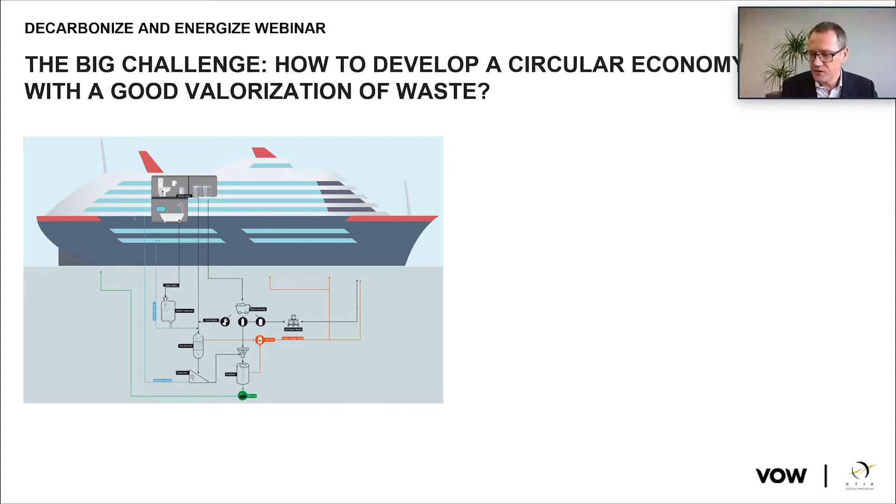The solution is a mix of technologies: filtration, drying, sorting, incinerators, anaerobic digestion, and pyrolysis. Scanship offers its clients a global integrated solution with a portfolio of these technologies, including a pyrolysis technology named MAP with microwave.

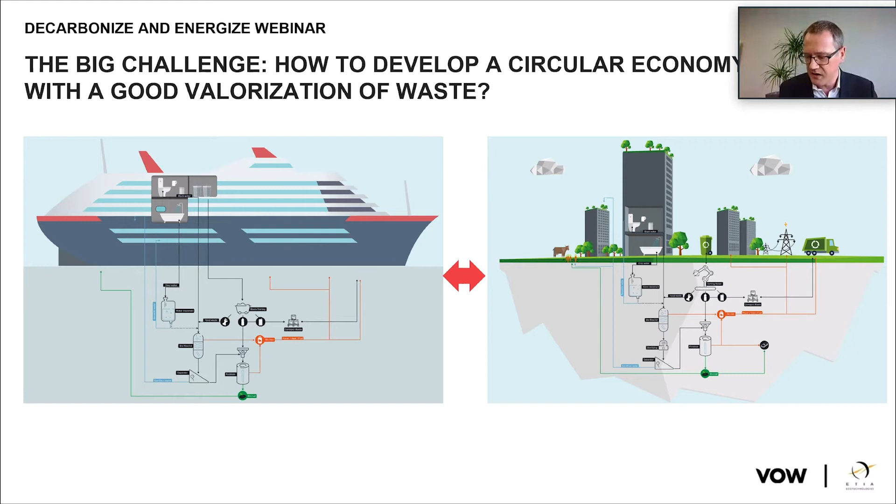For land-based solutions, it is very similar. The capacity can be bigger, and it is where Etia intervenes. So the first important element to notice: the solution for circular economy is a mix of solutions, among which pyrolysis.

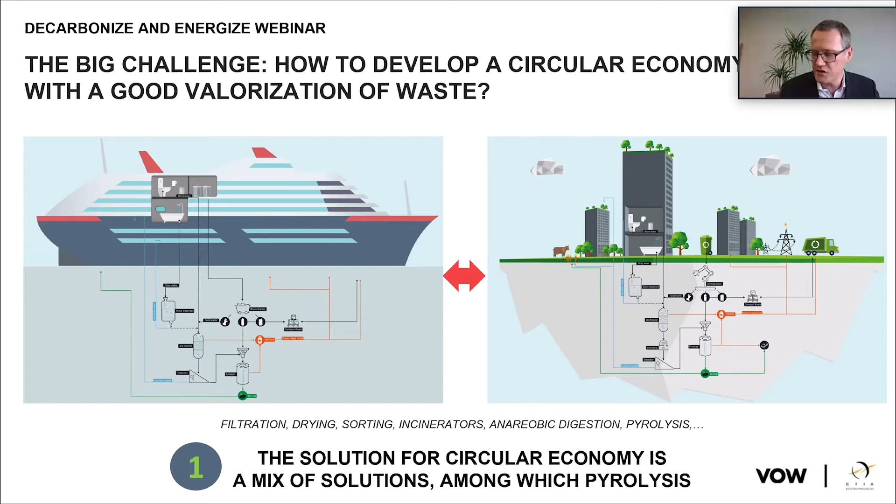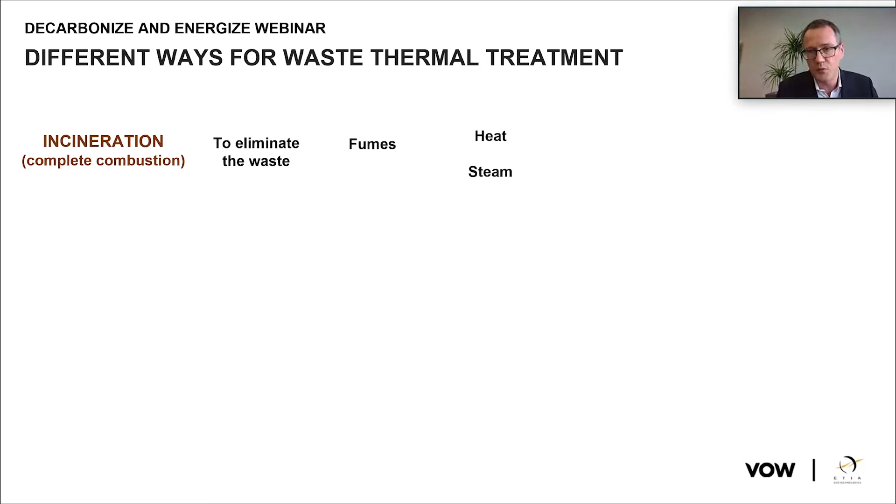Second point: there are different ways to valorize waste through thermal treatment, with 3 main technologies. The first, the best known, is incineration with complete combustion. The objective is above all to eliminate the waste, mainly household waste with a lot of heterogeneity. It produces hot fumes, which can be valorized as heat or steam, and after that, for instance with a steam turbine, to produce electricity, but with low efficiency.

Another possibility is gasification. Gasification is a partial combustion, and the objective there is different: to produce energy with a poor gas, because we use some air and so nitrogen. This same gas can go through purification and into an internal combustion engine that will get higher efficiency.

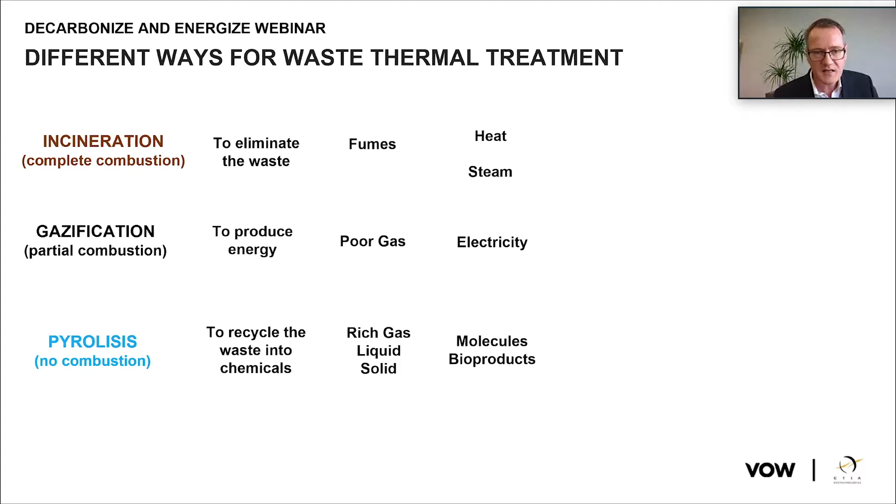And last is pyrolysis, where there is no combustion. With pyrolysis the objective is to go up to chemicals, to split the feedstock into different products: a rich gas, a liquid, and a solid, with different proportions depending on temperature and dwell time. In the old days, I find it very interesting that the pyrolysis of wood was named distillation of wood. That is the idea, to separate the different phases to give them maximized value.

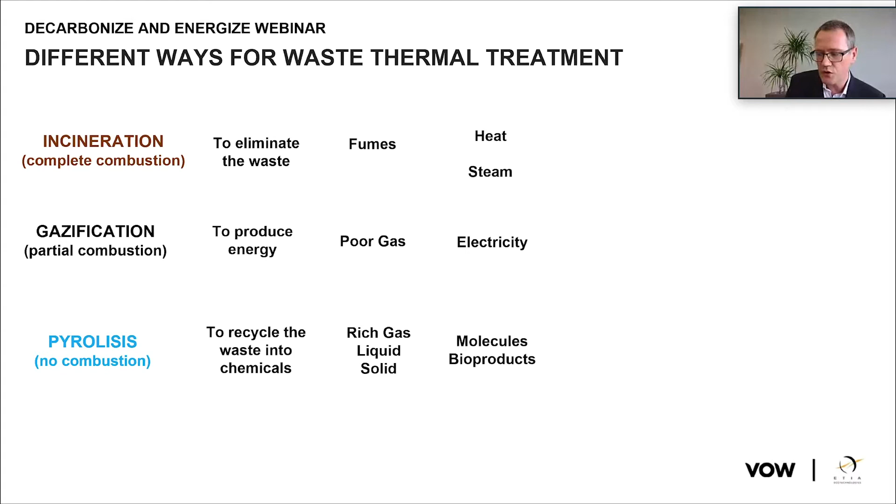With pyrolysis we can also produce heat, steam, and electricity, of course, but also some molecules like hydrogen, methane, and bioproducts with a lot of value.

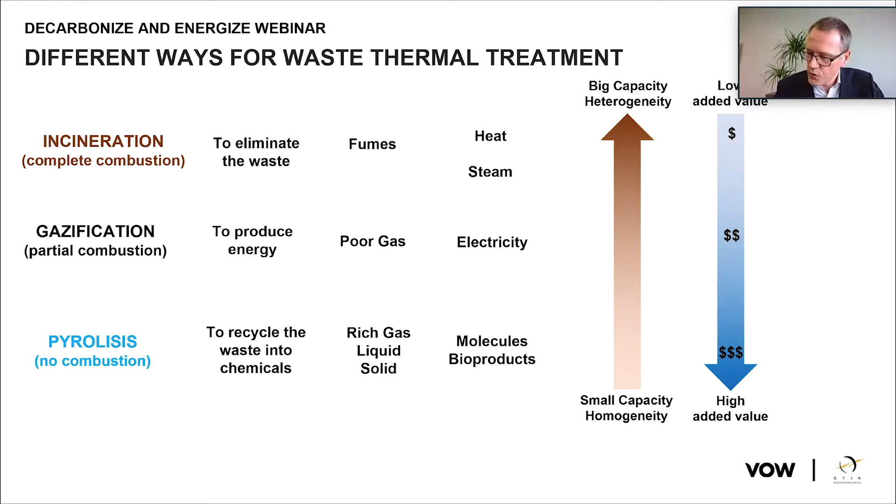Incineration addresses more big capacity with heterogeneous waste, whereas pyrolysis will be more in a circular economy with more specific waste. Pyrolysis also allows reaching higher values with the products, and last but not least, helps reduce more significantly the carbon footprint. So the second element to notice: pyrolysis is key to giving more value to waste.

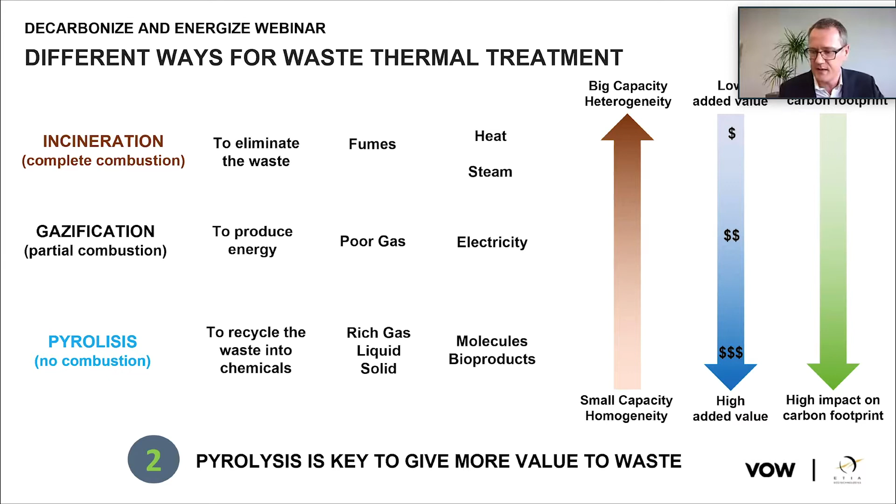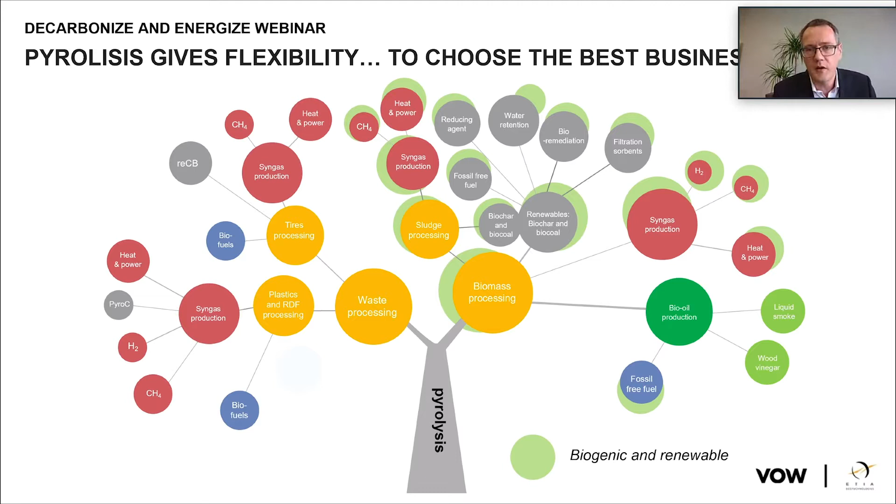And this is done through business model. As pyrolysis gives a lot of flexibility, we can choose the business model among different possibilities. It will depend on a lot of parameters, like the local conditions, the price and quantity of feedstock, and the local needs in terms of energy, electricity, hydrogen, or methane, and of course the price of these outputs. So depending on the feedstock and the energy and molecules required locally, we adjust and choose the best business model.

Third element: waste management has a lot of constraints in terms of regulations. These regulations are more and more strict, and that is good. One main principle in waste management is the waste treatment hierarchy. Producing energy is better than landfilling, of course, but even better than that is chemical recycling, when we can't do mechanical recycling because the waste is too mixed, for instance.

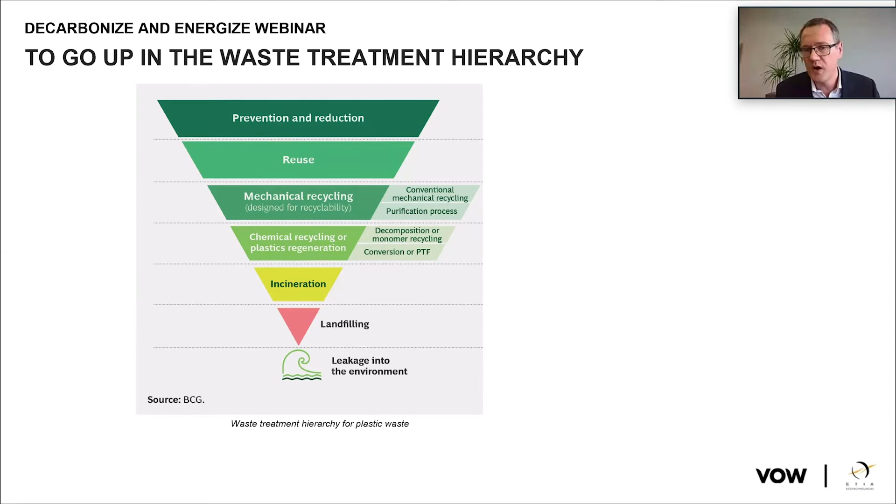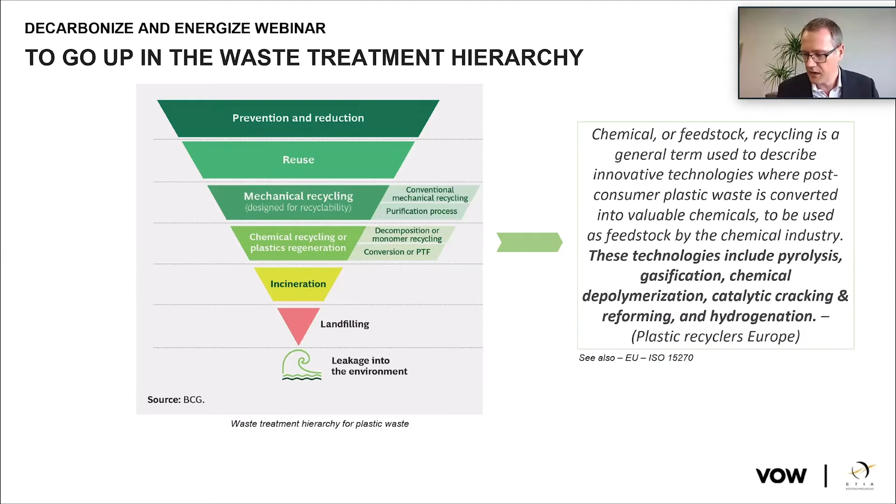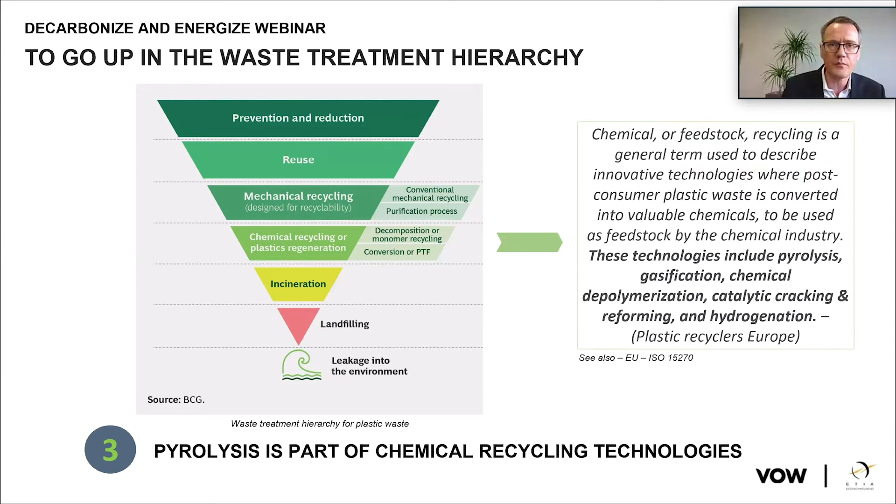As you have understood, pyrolysis is part of chemical recycling technology, and it allows us to move up in the waste treatment hierarchy. So after these first three main elements on valorization of waste, I want to briefly present our technology.

I will not be very long on that because it was part of the first webinar, just as a reminder. So, our main technology is named SPIRAJOULE.

It consists mainly of a screw with a hollow shaft, and this screw is heated by electricity going through it with the Joule effect. So the product temperature is precisely controlled by the heating screw temperature. We also control perfectly the dwell time by regulating the screw rotation speed.

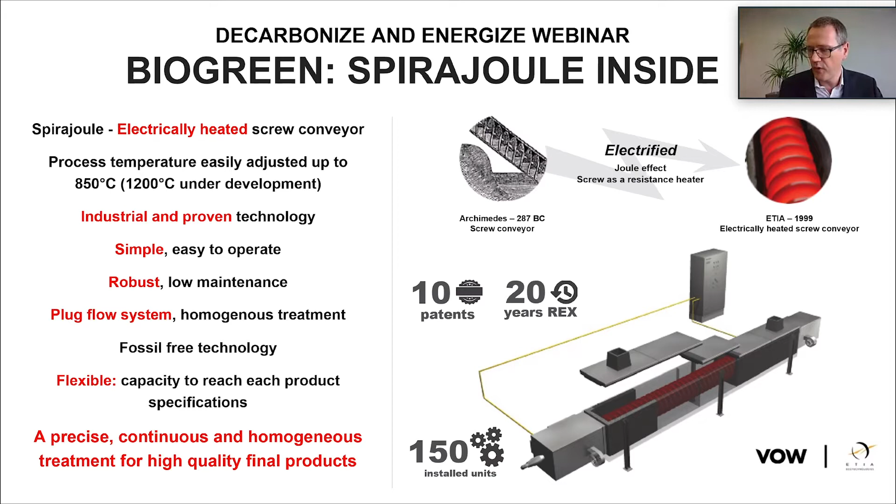We have more than 150 units in the world based on this technology, of which 40 are for pyrolysis. It is simple, robust, and above all precise, continuous, and homogeneous - all the conditions required to get high-quality final products. In real life, you can see there how it looks.

Now we will go through 4 business cases in order to illustrate these elements: sewage sludge, end-of-life tires, non-recyclable plastics, and a little bit different - how we can improve the recipe of feedstock with artificial intelligence.

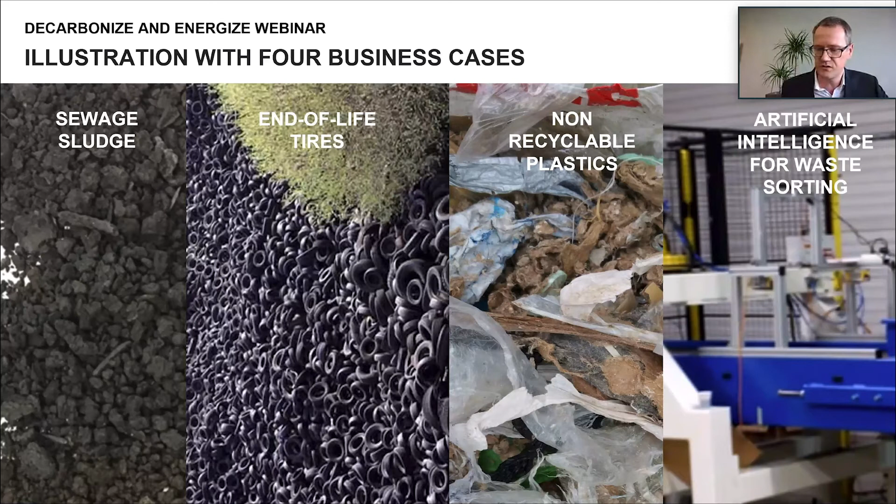First, the pyrolysis of sewage sludge. Sewage sludge is becoming more and more an issue in a lot of countries. One of the main valorizations of sewage sludge is through spreading these sludges in the fields as fertilizer. However, it implies many constraints: problems of odors, the possibility to spread only in part of the year, issues of storage, and the fact that sludges can contain pollutants like heavy metals, which is becoming a bigger issue.

Moreover, it is a very wet product if not dried, and drying is very energy intensive. Another valorization can be incineration, but it does not turn the waste into value, rather into a high cost. So what can pyrolysis do for sewage sludge?

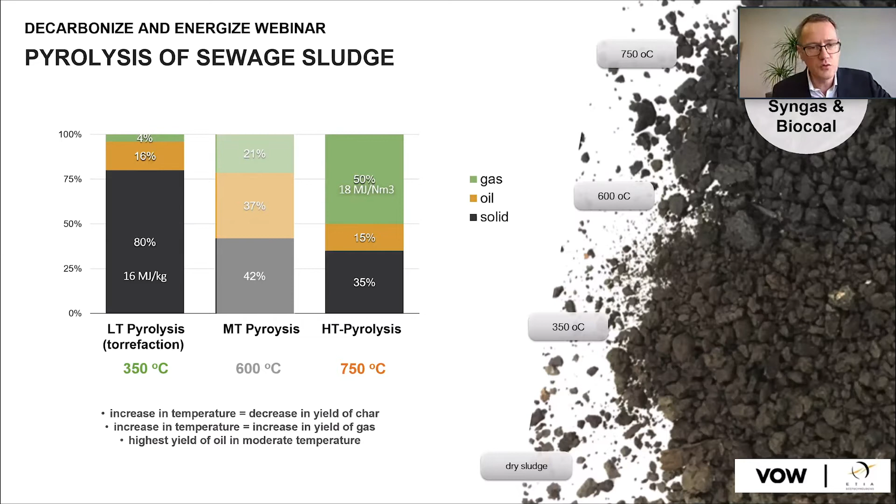You can see on this slide that depending on the temperature, at low temperature we will produce mainly a solid, which we call BIOCOAL, or a gas at high temperature. For our business case, we have chosen to produce at low temperature in order to get a high percentage of BIOCOAL. This business model is illustrated here.

The municipality, in this case in Japan, has more and more issues with sludges. So a company, our local partner, sells BIOGREEN, the SPIRAJOULE equipment, to the municipality to treat its sludges. These sludges are turned into BIOCOAL, and the company commits to buy back this BIOCOAL. Why is the company interested in this BIOCOAL?

It is because it can use this BIOCOAL in a coal plant to produce electricity, and they can benefit from a very interesting feed-in tariff because the BIOCOAL comes from biogenic feedstock. So it is a win-win-win situation, both for ourselves, the company, and above all, the municipality.

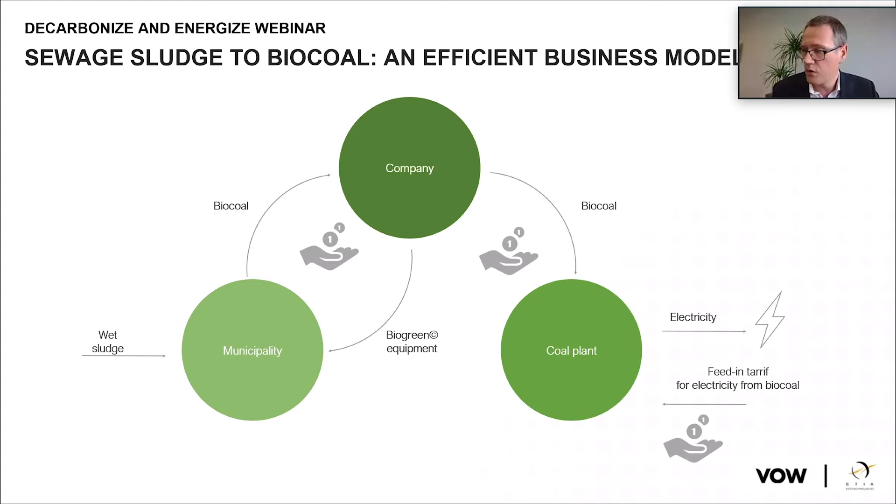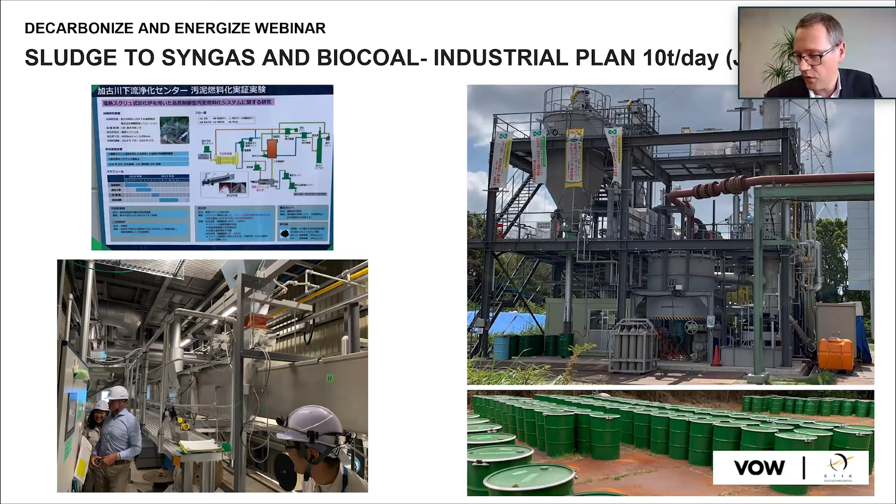But we can do another business. Here are some photos of our first industrial plants in Japan, treating 10 tons of sewage sludge per day. Here is another business model for sewage sludge.

The objective there is to treat the sludges at a higher temperature, around 700 degrees Celsius, in order to produce enough SYNGAS to dry the wet sludges. Drying wet sludges is very energy intensive, and very often natural gas is used. In this situation, instead of natural gas, we use SYNGAS, which avoids a lot of fossil fuel consumption.

And afterward, we can get a little bit of biochar, of BIOCOAL, to be valorized in different ways.

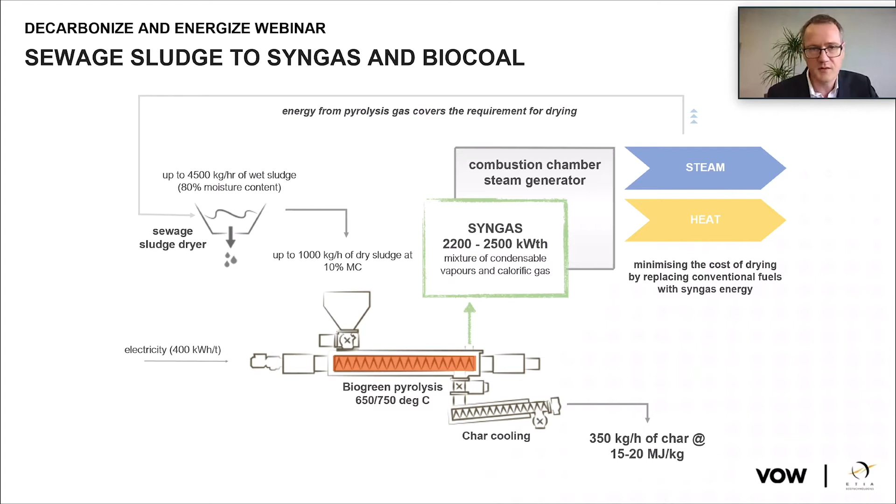Second business case: how we can give a second life to so-called end-of-life tires, and more than that, create a product that can be reused in the manufacturing of new tires. This is what we are doing in the UK with our partner, Murfitts, which recycles more than 100,000 tons per year of end-of-life tires.

To give you an idea, there are 2.5 million tons of end-of-life tires in Europe, and many more in the US and Asia. So the objective is to transform these end-of-life tires into energy and RCB.

RCB means recycled carbon black. RCB is one of the main raw materials used to manufacture tires. There are a lot of different types of RCB depending on the physico-chemical parameters, and these parameters are very key to meeting the requests of manufacturers, with parameters like surface area, porosity, structure level, surface activity, and many more.

What we have achieved with our partner is a whole process able to produce a very high added value RCB, filling all the requests of the manufacturer.

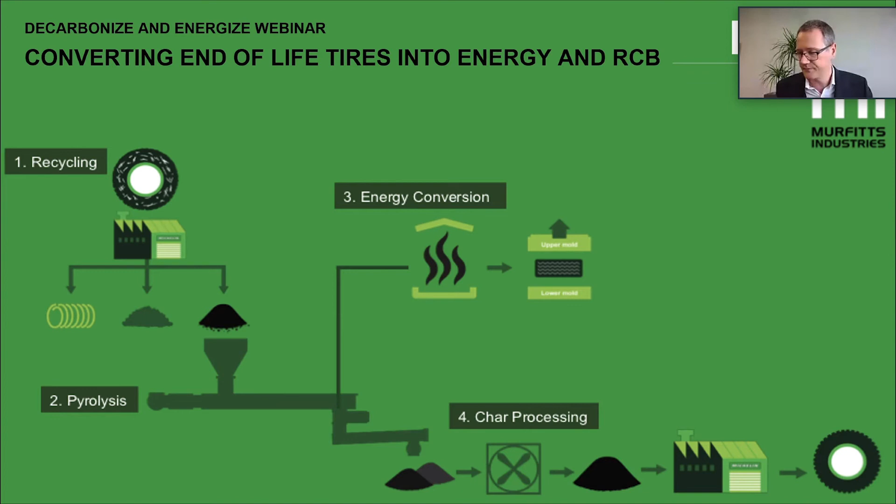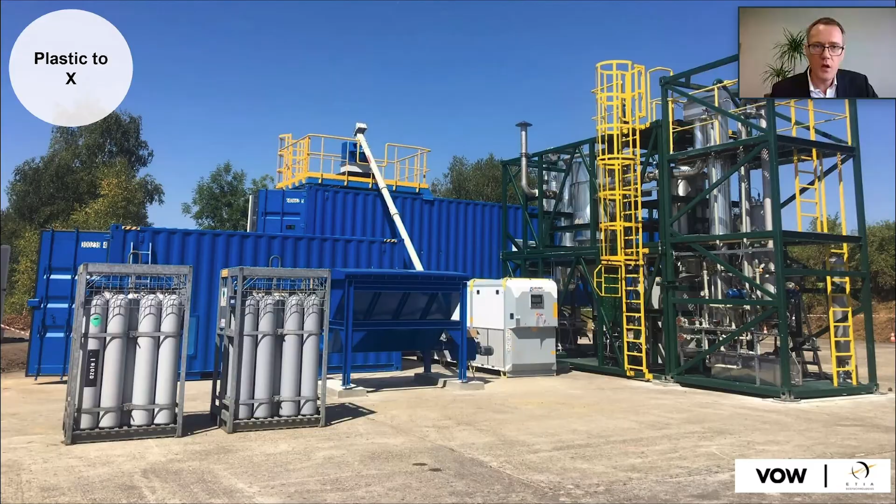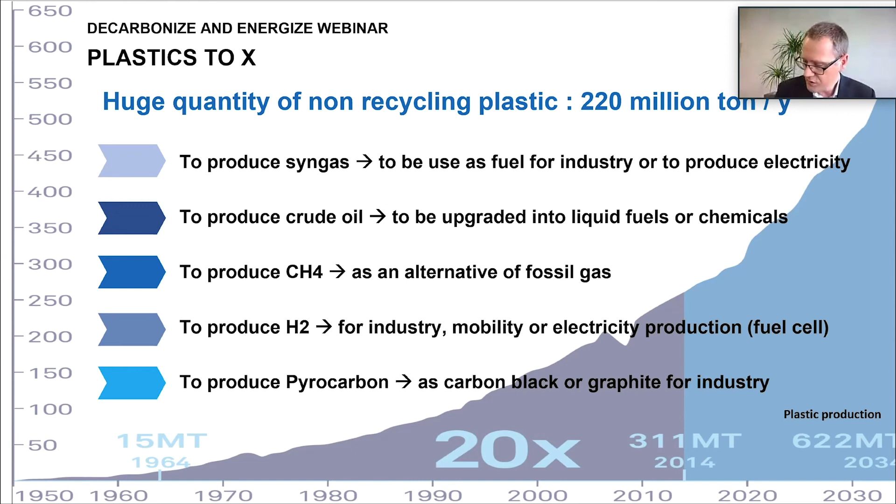The third business case is plastic to X. As you know, there is a huge quantity of plastics that are not recycled, 220 million tons per year. Plastic to X means we turn these plastics into different products depending on the local business model. X can mean SYNGAS to be used as fuel for industry or to produce electricity, a crude oil that can be upgraded into different chemicals, or methane, or even hydrogen for industry or mobility, and also pure carbon, a solid carbon used in different parts of industry.

A first example is plastic to electricity. We are working on this business case with Race for Water, an NGO fighting against pollution in the oceans. They want in particular to develop a solution for islands that have a lot of plastic on their beaches. At the same time, the production of electricity on these islands is often done through gensets using diesel at a very expensive price.

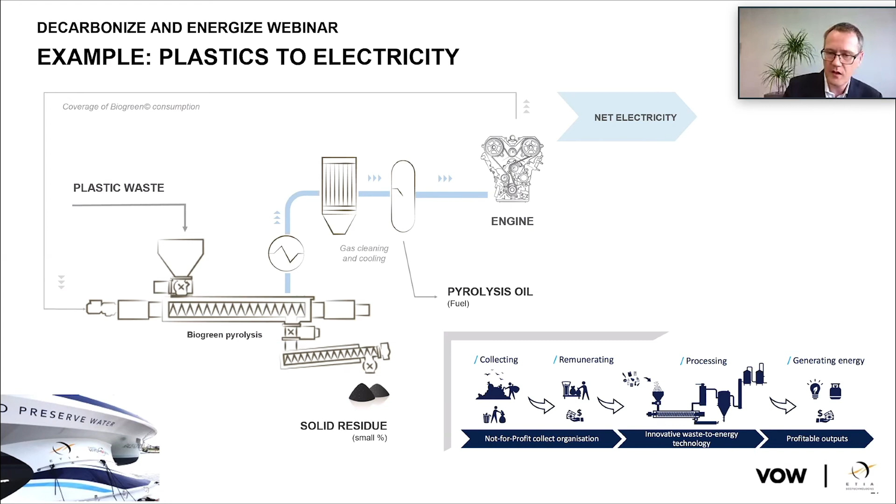In Europe, for instance, this business model can't be the same. As the price of electricity is much more competitive there, we have to find higher value products. These products can be methane or hydrogen. I particularly like the hydrogen pathway. Plastic is actually a mix of carbon and hydrogen.

To cut these molecules, we need to do a pyrolysis at very high temperature, more than 1000 degrees. The more you heat, the more you cut this molecule, and so the higher is the rate of hydrogen. The beauty of that is the output is hydrogen, a very valuable product for mobility without emitting greenhouse gases, and some carbon at the same time that remains as a solid, a carbon sink. In a nutshell, we can produce energy with a fossil raw material, the plastic, without emitting greenhouse gases.

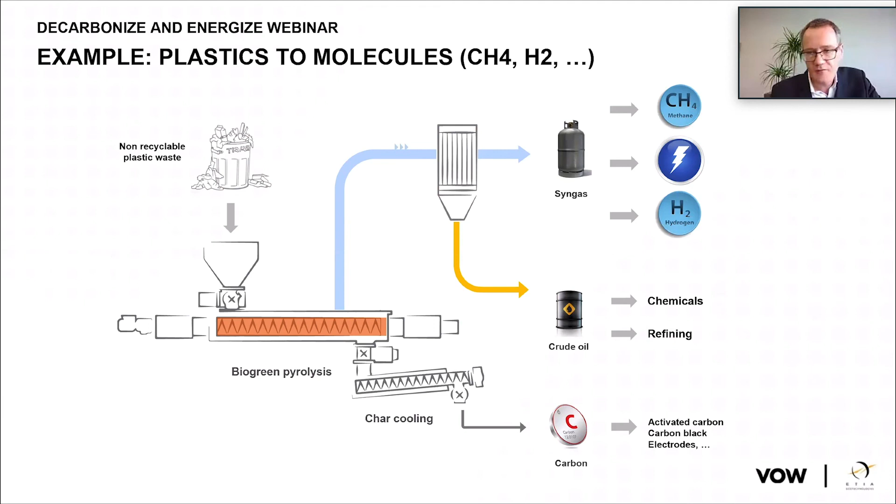It is what other industries try to do with carbon capture storage, for instance, but that solution needs big underground cavities, and we can't find those everywhere. The solution we present can be rolled out in all local authorities with production of hydrogen at the local level. So we have different projects ongoing on this subject.

The last business model I want to speak about is a little different: how we can use artificial intelligence for waste sorting. This is done by our subsidiary Ascodero, specialized in robotics. The objective is to enhance the quality of the feedstock we want to valorize. If we want to produce high added value output, we need higher quality feedstock. Very often the feedstock quality is good, but could be far better if a small percentage of pieces are removed. Unfortunately, human beings cannot sort waste up to the level required, and certainly not to 100%. Only technology can do that.

So we have developed a specific waste sorting system with artificial intelligence and robots in order to identify the pieces to be removed, take them quickly, and remove them efficiently. The identification is done through visualization with artificial intelligence, in partnership with PICVISA, an innovative technology company that provides industrial solutions based on image processing and machine vision. We have particularly worked on recognition of some metals, and we are developing new solutions for sorting centers for organic waste.

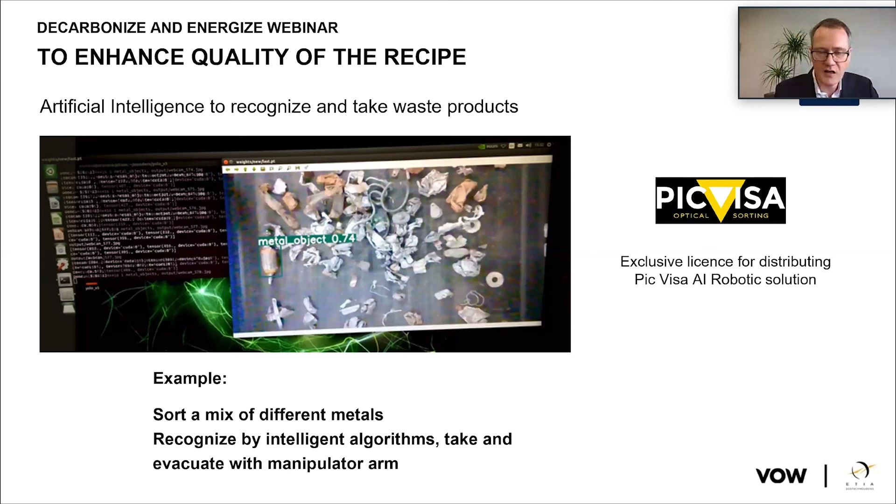So I have finished my presentation. I hope you're still there, and we can now answer a few questions.